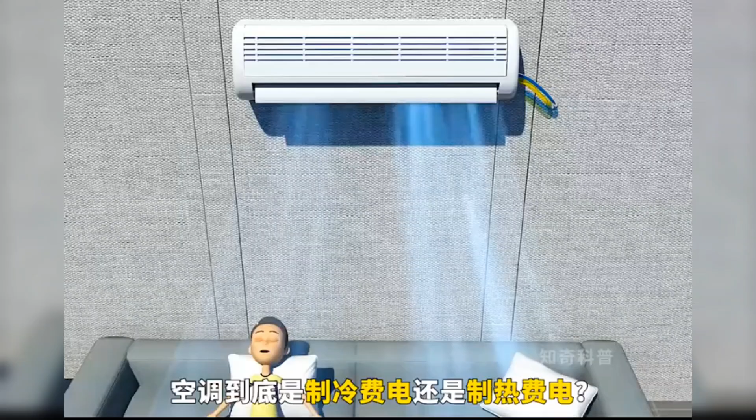Is the air conditioner more power consuming when cooling or heating? I didn't expect the difference in power consumption to be this much. This is a basin of cold water. If you place it in the room, the water will continuously evaporate, and since evaporation requires absorbing heat, the temperature in the room will decrease. This is the basic principle of air conditioning cooling.

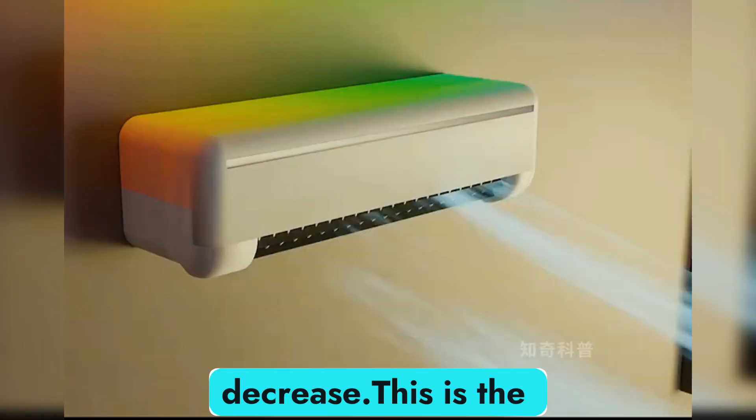But relying solely on water evaporation for cooling is really inefficient. So you plan to use more volatile alcohol as a substitute, but alcohol is still flammable and unsafe. So, you have to continue searching in the periodic table and finally found a perfect refrigerant, Freon. Its boiling point is -30 degrees, which means it can quickly evaporate and absorb heat at normal temperature and pressure, and its chemical structure is stable with negligible toxicity.

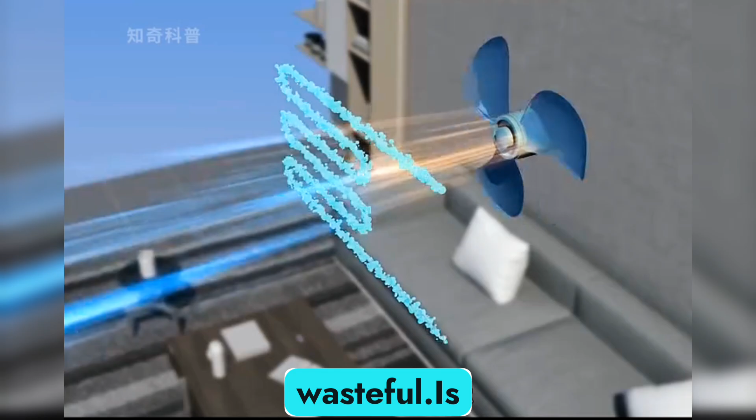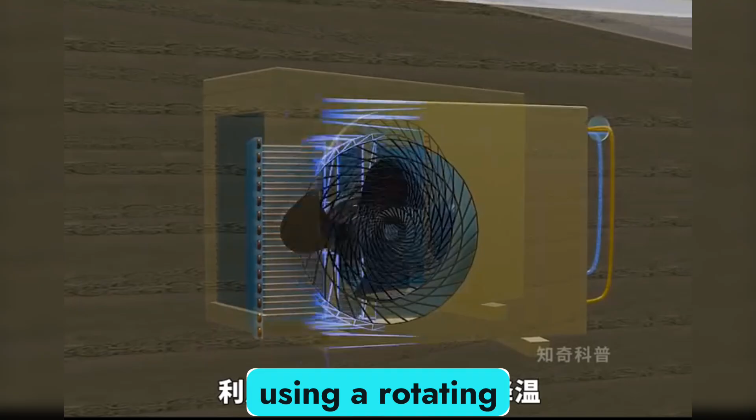Then, as long as you keep adding Freon to the basin, you can achieve rapid cooling. But you find this very wasteful. Is there a way to quickly collect Freon for recycling? While cooking at home, you accidentally notice many small water droplets condensing on the pot lid. This physical phenomenon inspired you, so you use copper pipes to draw the gas to the outdoor unit of the air conditioner, using a rotating fan to quickly cool it down. But due to insufficient temperature difference, the gas does not condense quickly.

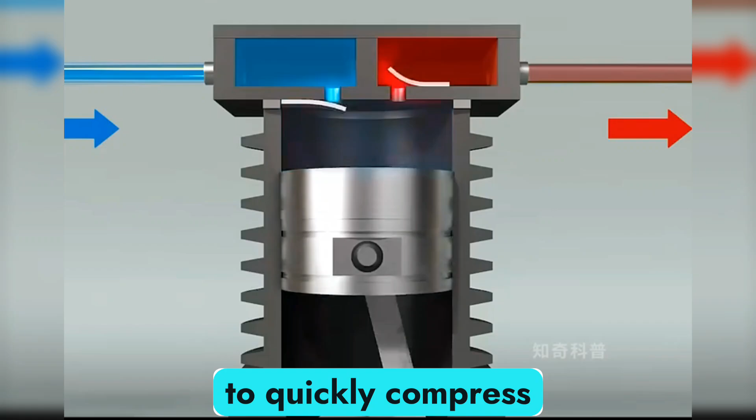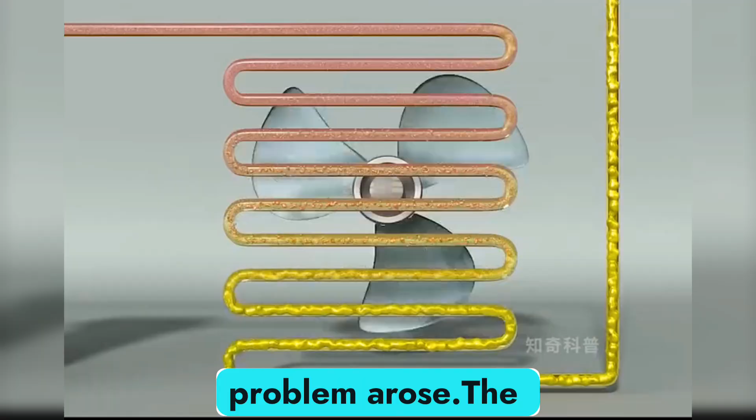The clever you thought of an air compressor, using it to quickly compress the gas, rapidly reducing the molecular distance, thereby raising the temperature to 80 degrees. At this point, after cooling with the fan, since a sufficient temperature difference can be ensured, the gas will liquefy into 40-degree Freon. However, a new problem arose. The cooling effect of the 40-degree Freon liquid was not sufficient.

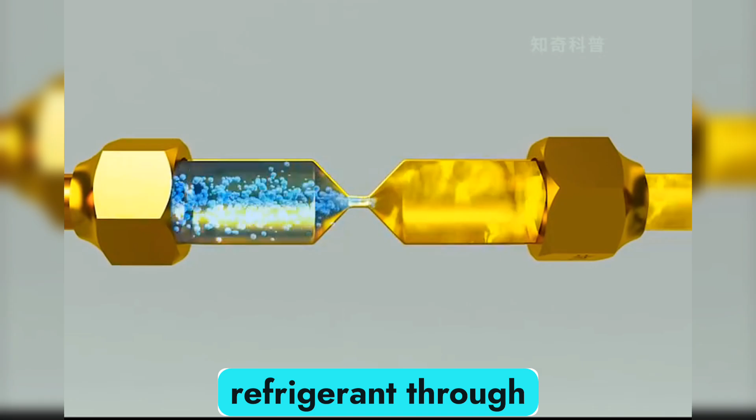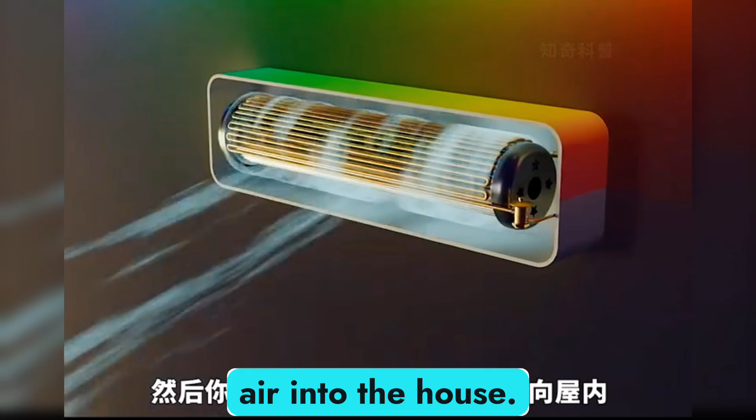So you added an expansion valve, which is similar to a sprayer, quickly squeezing the high-temperature, high-pressure liquid refrigerant through a small hole, turning it into a low-pressure gas-liquid mixture at only 7 degrees. Then it is sent through pipes into the indoor unit of the air conditioner, where it evaporates into a gaseous state in the copper pipes, thereby absorbing the heat from the indoor air. Then you use a drum fan to blow the cold air into the house. Congratulations, you successfully invented air conditioning refrigeration.

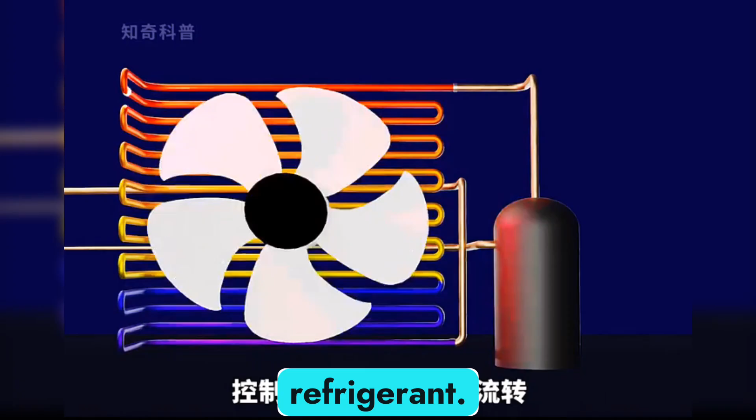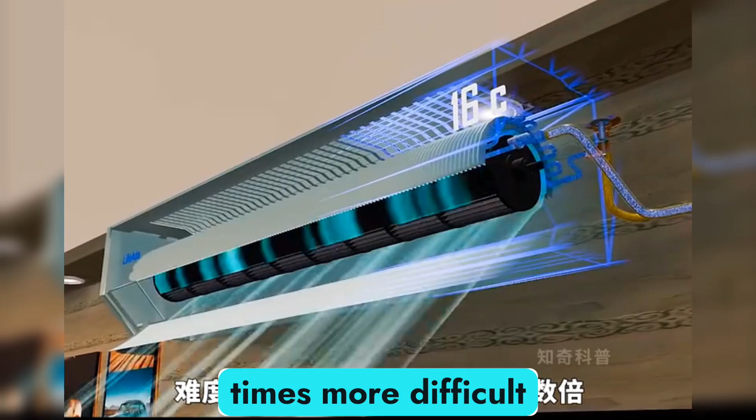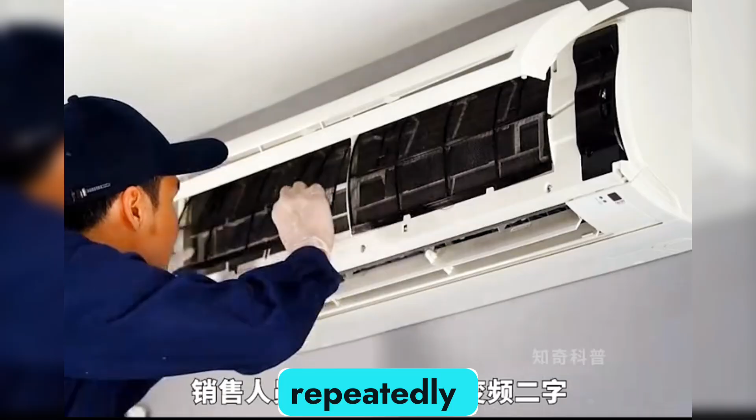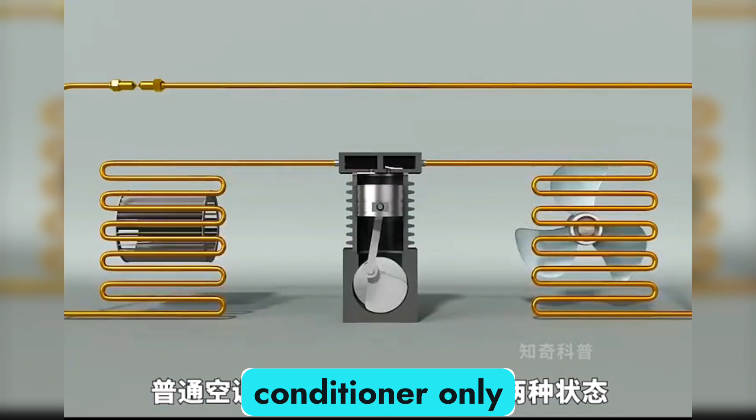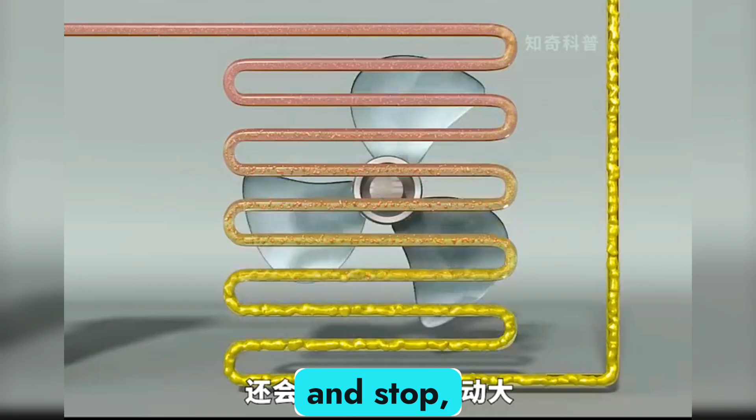And when you go to buy a refrigerator or air conditioner, pay attention, the salespeople will repeatedly emphasize the words inverter technology. Do you know what variable frequency is? Simply put, it means the compressor operates differently. The compressor of a regular air conditioner only has 2 states, on and off. When your room temperature reaches the set temperature, the compressor will stop. When the room temperature rises above the monitoring limit, the compressor will restart at full speed, continuously cycling in this way. This not only requires the compressor to frequently start and stop, but also causes large fluctuations in room temperature.

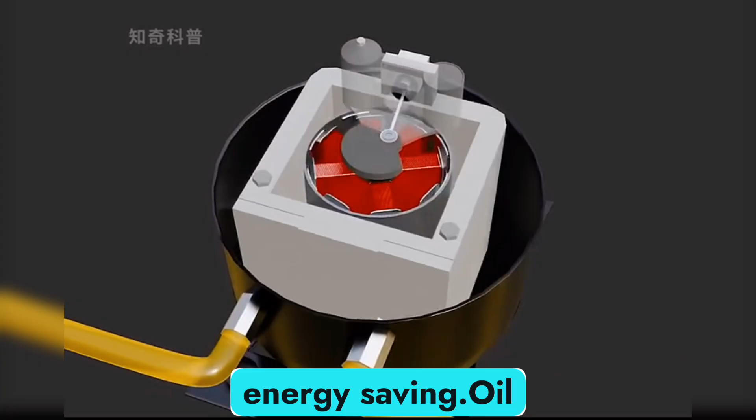Later, Toshiba in Japan invented the inverter air conditioner, where the compressor can automatically adjust its speed according to the room temperature to maintain temperature stability. Relatively speaking, an inverter air conditioner is like a car that automatically adjusts the throttle, very smooth and energy saving. In contrast, a regular air conditioner is like a car that frequently stops and restarts, consuming more fuel and being bumpy.

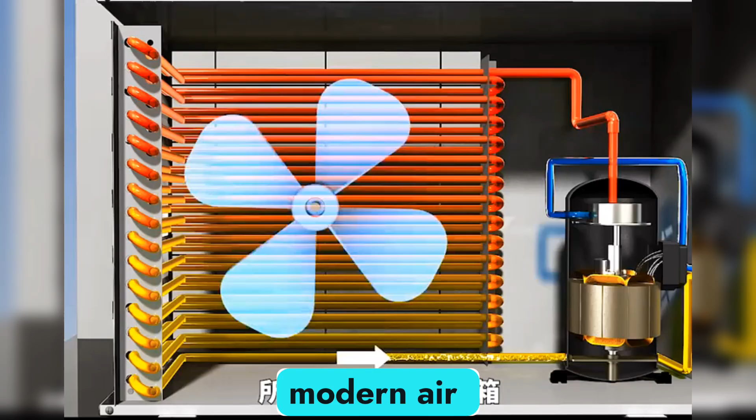As is well known, Freon severely damages the ozone layer. So modern air conditioners and refrigerators basically all use environmentally friendly refrigerants. As one of the great inventions of the 20th century, air conditioning has benefited generations of people. How did people in ancient times cool down without air conditioning? And how did they transport lychees from Lingnan to Chang'an?